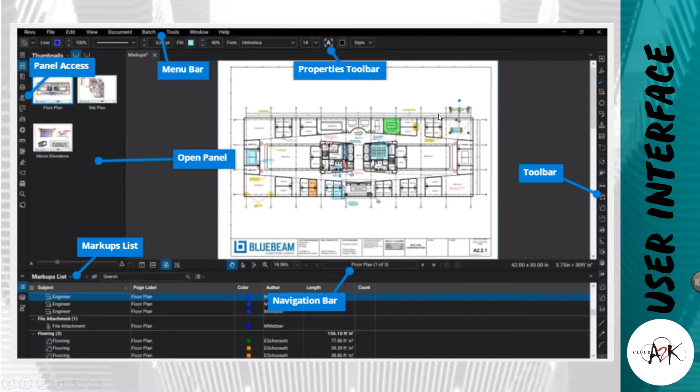The power of the PDF is that it contains all the metadata, so it doesn't just contain drawings or images. You can put hyperlinks in there, bookmarks, file attachments, images, and all the 3D data. It's really harnessing that metadata.

Now we'll get into the Revu demonstration in Revu 20. So this one here is Revu 19. We can see here we've got Studio Bluebeam, which is our American server. We also have the UK server. If I flip over now to our Revu 20 version, and go to our studio here, we have an Australian server - that little Australian flag there - and we can now go and host our data locally.

Revu 20 makes it easier than ever for your team to get more done together. It has greater flexibility control, enhanced markup and measurement tools to help you better manage your data. So I'm going to open now - I'll go through my Oz Studio, sign in.

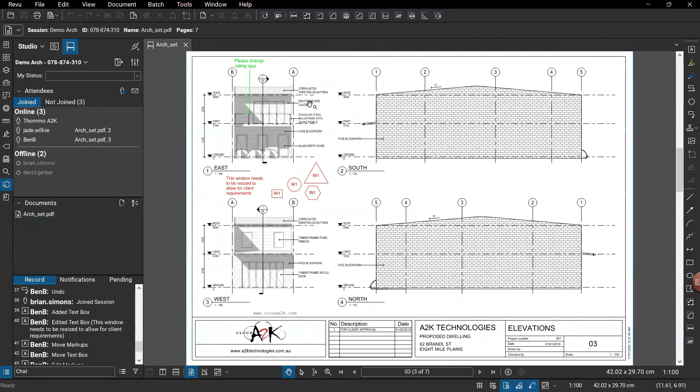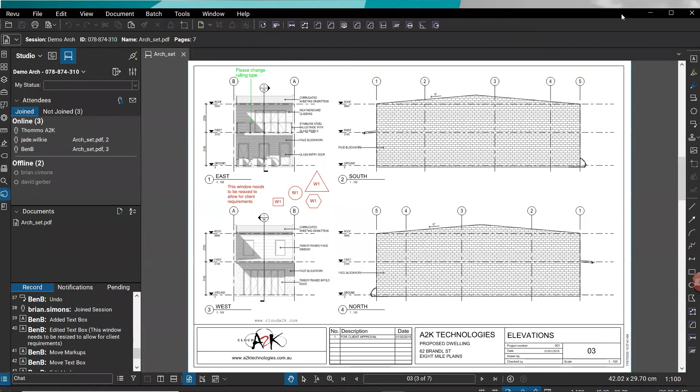One of the first things I really want to go through is the custom line types. Custom line types are available through our custom toolbars - I'll go back to my 2020 version here - and through my measure at the top, I can get in a simple perimeter or an area. So if I do a perimeter, I'll drag that perimeter around and close that off. Now, when I do this, we have a lot of extra features in here.

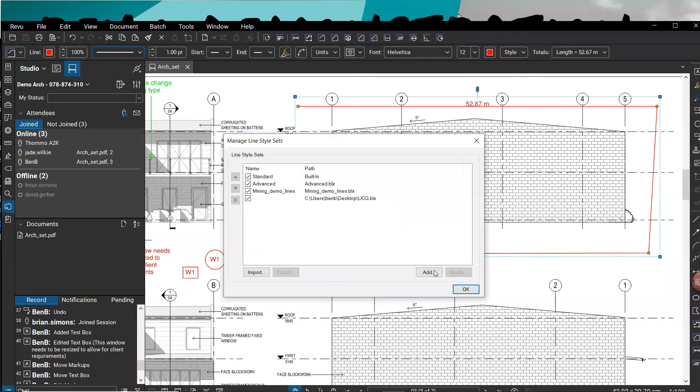With this line itself, I can come here and change it to multiple types - I can change it to a gas line, hot water, and I can also use custom line types if I wanted to through here. In 2019, we couldn't do that. I'll just sign in here as well - this is signing into the American server.

Be aware that the new Australian server is only on Revu 20, so you do need to upgrade to that.

I'm joining another session here which has the same work area on it. If I open this up, you can see that it's 19. If I go to do a line style in here, I only have the 6 types of line styles. So if I go to my properties now to change that, I'll see I've only got the standard 6.

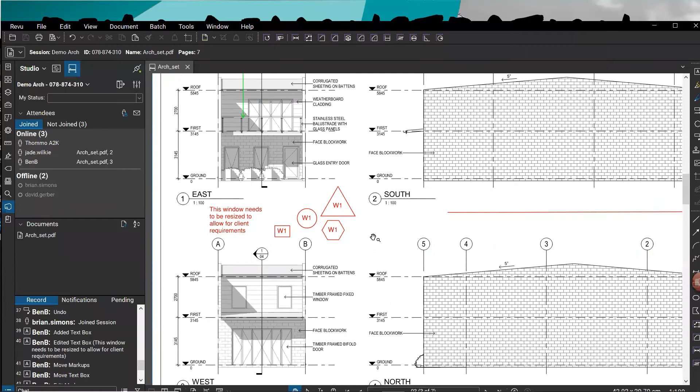So now we have a lot more user-friendly ones in there to use. That is one of the great improvements. Another improvement as well is we can change the style of our box here for a call out.

So for a simple text box, I can put in whatever text I want. I'll just call this roof for the example. When we go to apply a shape, I'll give that some thickness. In the new version, we have a hexagon, which may be a bit more useful for the engineering field. So we've got that hexagon in there as the new shape, where previously we only had the square, circle, and triangle. Now we have the hexagon shape.

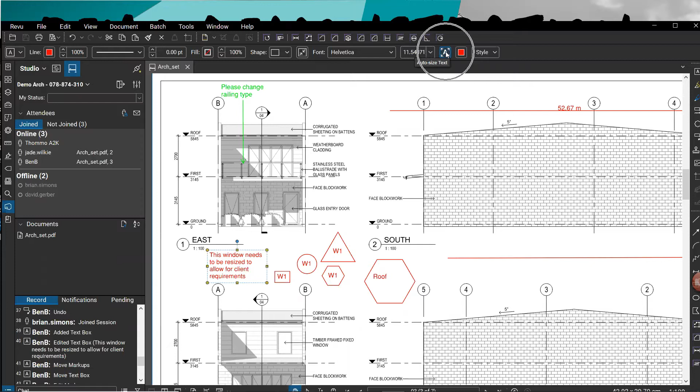We've also gone through and improved the multi-line text auto sizing. So we'll see here in 20, when we stretch out that to auto size the text. By selecting this here, or selecting it through our properties, by the auto size, that's where you change it to auto size here, and it really improves it for multi-line text.

As I stretch that, I'll see that it actually stretches that text out, changes it across to 2 lines, can change it to 1 line as well. So that is a great improvement.

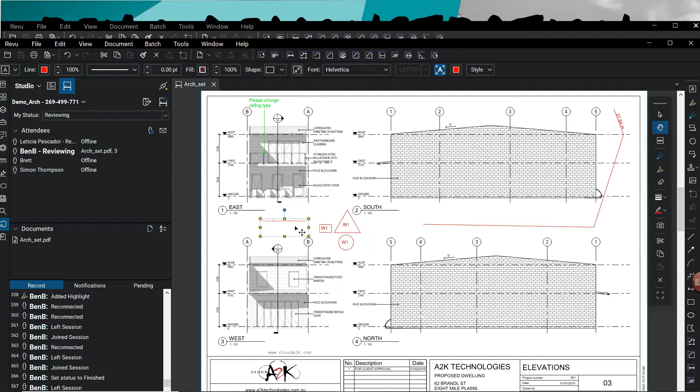Formerly in the 2019 version, where we had the text, if you did auto size the text and stretch that out, it won't go to the next line. So we can see that that just stretches the text out in 1 line. It's really improved that workability through here, when that will actually resize the text. That's a great improvement for markups.

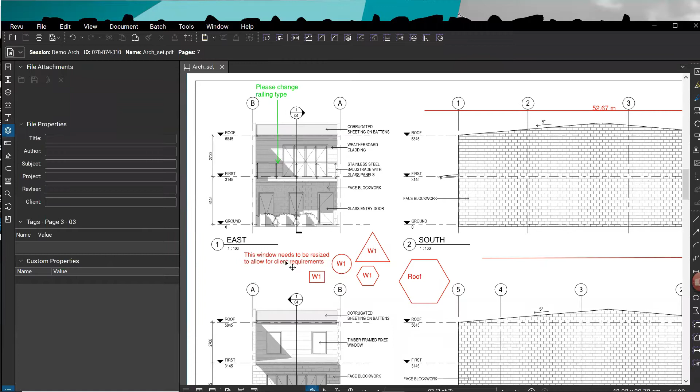Another thing we can do is put in arrows easily, so we can easily change this from just a standard text box to a call out. If I select on this here, we can see it's a standard text box. So if I right click, I can then add a leader, and this will change it to a call out. We can see as well that it picks up a different area for it, changing to a call out, and it actually takes it to the nearest point.

I can keep adding these leaders, so you can have multiple leaders and they won't all come from the one point. Again, if I add a leader here, I can take this to the bottom and it comes off the nearest point. That's a great improvement to what it used to be, where all your leaders would actually come off the one point. This will all grab the nearest point.

So that's a great feature through there.

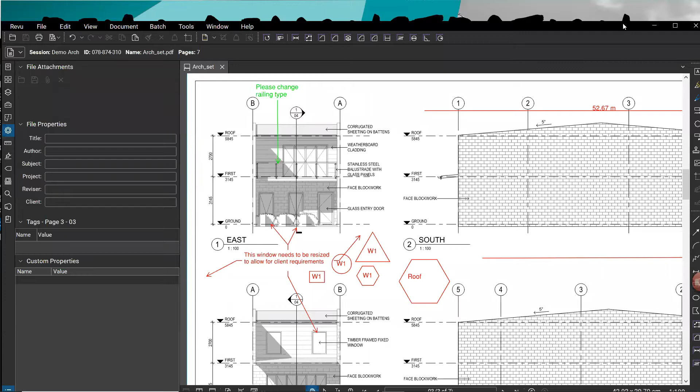We also have an improvement to our markup filter interface. Now we'll see that the filter has changed. If I select that, we'll see that it goes orange through here and it has a new interface. The beauty of this is we can easily add in the different items. Through here, the author, I can pick that and have my comments through here. I can also add the other comments from the other Ben B, which is still me. And I can add in markups as well for a particular page.

So I can come here and add in 01. What I can do as well is actually save these markups, like save this filter. If I click on here, I can now save this filter, so I'll save this as Ben's. Now that I have that saved, I can easily go through, and when I start a new project, they will be there. It makes it really useful to go to these markups in the filters list and select those filters straight off.

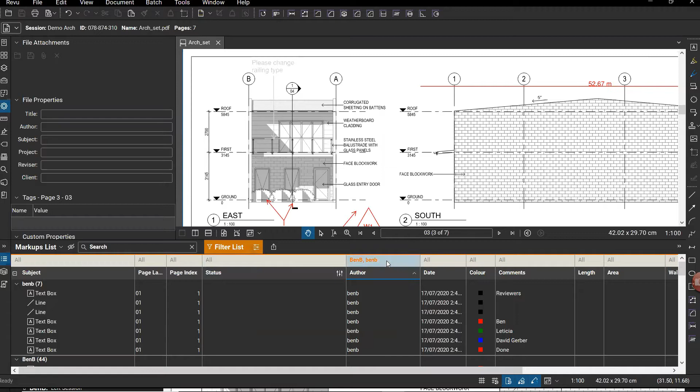I can delete them as well and make sure I keep that nice and trim. So that's a great way to be able to apply those filters easily to all the markups you have in there. It's a lot different in the interface than it had before.

Another improvement is in the area, distance, and numbering. Through here in the filter list, what I can do now is filter these areas by greater than or equal, and less than. We couldn't do that before. I'll go back to 19.

I'll go back to 19 through here and open my markup list. Once I go to apply those filters, I will see that I only have equal or does not equal.

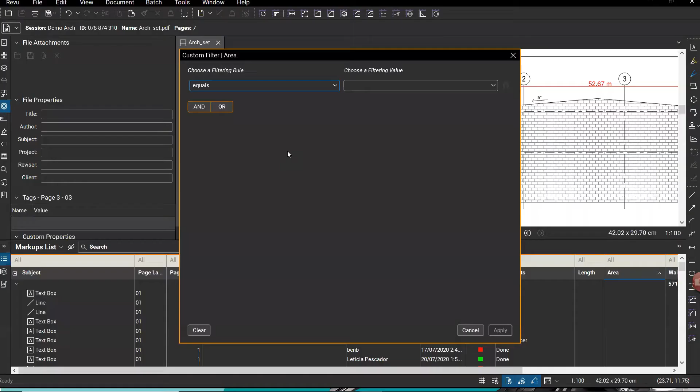So now in 20, we have that new feature where we can use greater than or equal. That will help a lot with your area and lengths, where you can rule out anything larger than a certain length, etc. So that is a great feature.

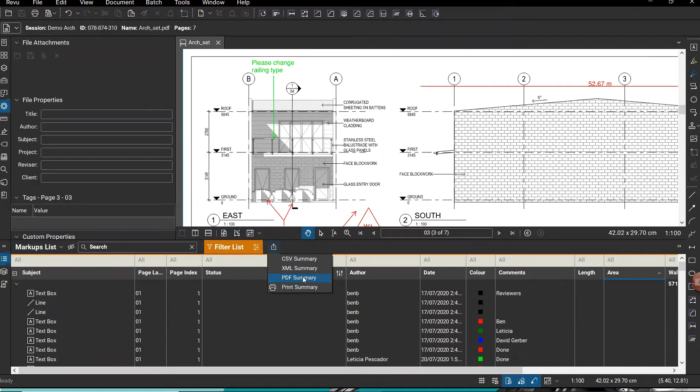Also exporting your markups. So when you go to export your markups, if I go here and do a PDF summary, this is a feature that a lot of people have been asking for. So under your output, under our options, we have in here where we can take out the replies. This will allow it to be a lot cleaner, particularly for those using the comments in Excel, that will make it a lot cleaner and you'll be able to pick out those lines a lot easier. This feature was unavailable in 19 and it's a great improvement.

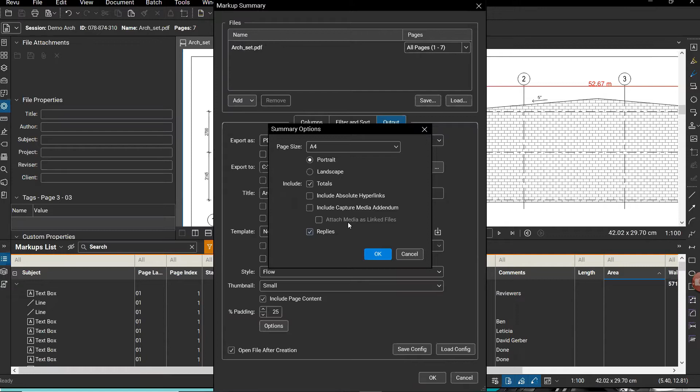So I'm now going to start to explore sessions themselves. One of the great features in sessions is that we now have a list of who has joined and not joined the project. So we come in here and we can see in the new Revu 20 data interface, we've got joined and not joined. This is a great feature because it actually saves time and reduces that risk.

A lot of people in the past, the emails actually come from Bluebeam and they've filtered them off into either a junk mail or a Bluebeam folder, and they haven't actually got the invite into the session. So you won't miss another session or project due to a missed invite email.

You can also check who hasn't joined your session. If you go through here, you've got a quick way to be able to select those and then send the reminder. So that is a much quicker way, and it's easier to get that management of the project. So you can set those permissions easier.

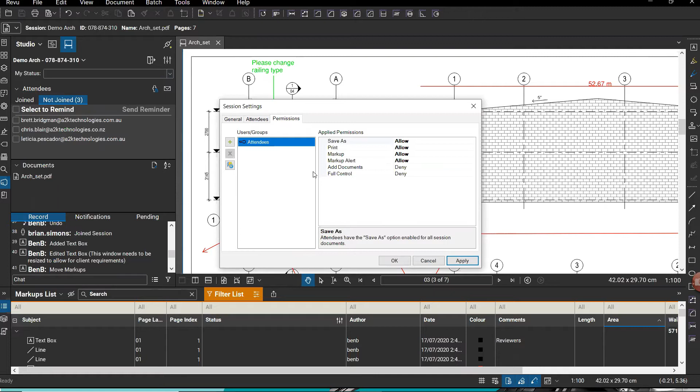It's all through here. It's all a lot easier, which manages to save time, maintain your security, and ensure that participation. So you have that list of people who haven't joined, and you can easily invite and manage that project.

This leads to higher adoption as well, and it will increase the return on your investment with the higher studio adoption. So we're all about collaboration with Revu 20.

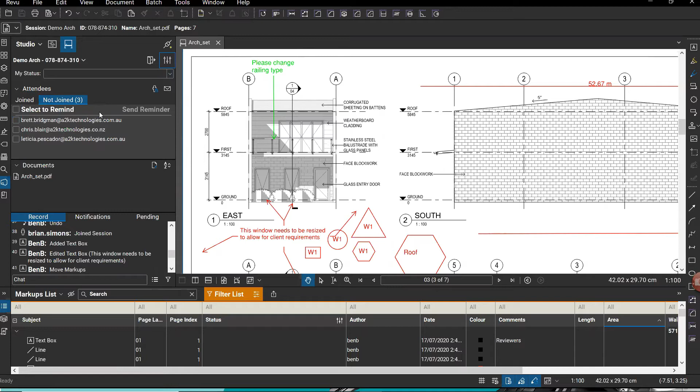We really want people to start to use and really start to get the benefits of both studio sessions and studio projects. If you don't quite know how to access them, always feel free to reach out to your Cloud A2K representative.

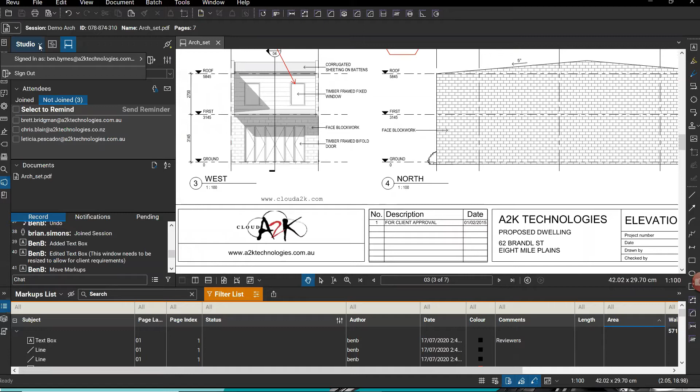When you actually start a session, what I'll do is I'll just start a new session. So I'll just leave that one, and I can go here to start a new session. So we've really improved the invite process. If I just go to demo test, I won't restrict the attendees by email address. And okay, I will add a small file in.

So that's added the file, and you'll see that this interface is a lot newer. So now we've got the opportunity to type or paste emails, add emails from group, or use address book.

And one of the good things with this type and paste emails, I can select that one there, and I can simply go to like an old email, or even if I've got something from an email that was sent, I can grab all these names. I don't need to worry about all the cases and text in there or whatever. It will actually recognize and remove those extra characters.

So once I paste that in, I've got all those names in there, and now I can check and include those emails. If I hit check and include emails, I'll see straight away it has gone through and it's picked out those email addresses. It's also picked out these domains. This will easily ensure the right people have access to the right information.

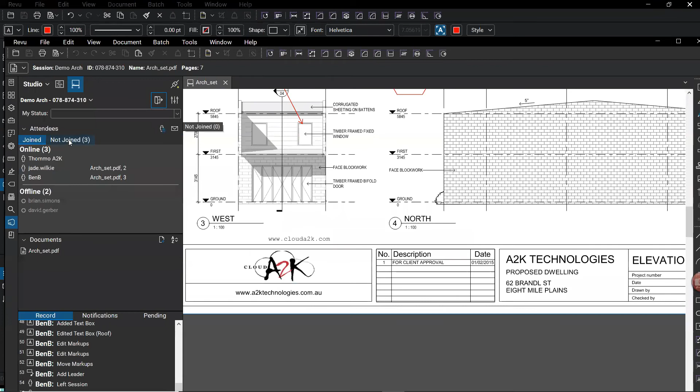The other big new item we have is that we can search for commands. So I'll just go back to my other session. I'll leave this session and go to my architecture session here. So it comes up quite quickly, as we can see. So we can easily search for a command.

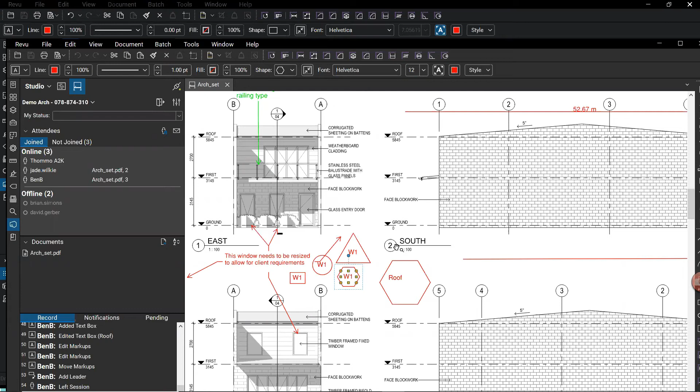There's a lot of different commands, obviously, and some people do get a bit overwhelmed, even though this interface is quite simple. You've got all your icons for all the items you'll be using through here, all your tools, markup tools, your measure, etc. So there's a lot through there. I know that I can change the color of this item. Once I select it, I know that I can do the color processing, or change colors, etc. So what I'll do is grab just a screenshot. If I use my G command or my snapshot command here, I can take a snapshot and then paste that back in.

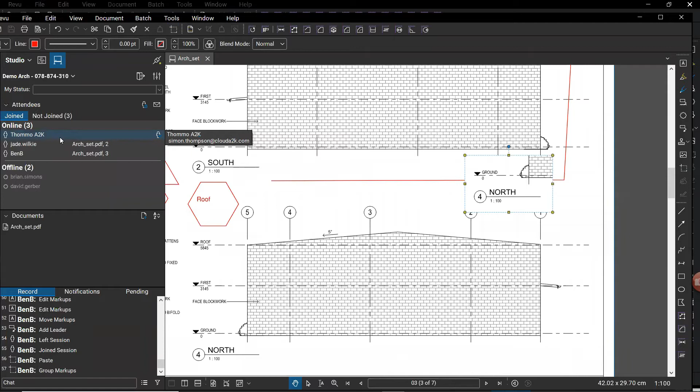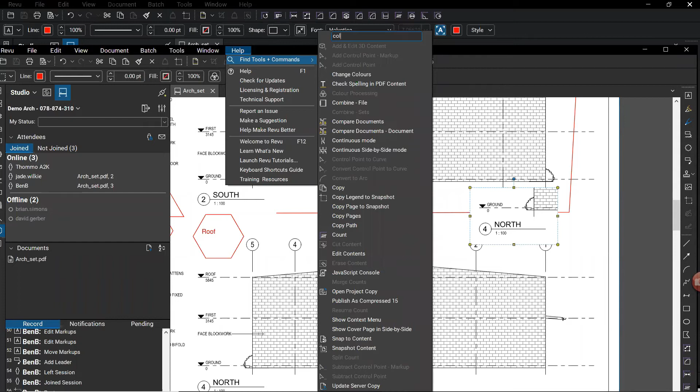Now I can change the color of all those items in there. I'm not sure if you weren't sure whether to do it through properties or whatever, but I know that there is a command to change the color. So I can go under my help tab here, select that, and go in through my find tools and commands. Now this is a great feature. It's used in a lot of other CAD softwares, etc. And it's a great way, particularly for people who aren't familiar with Revu, to come in here and just know that, well, I can change the color. So as soon as I start typing in that color command, I'll get that change colors option. Then I can change the colors of these items, go through and change all my black to red, etc.

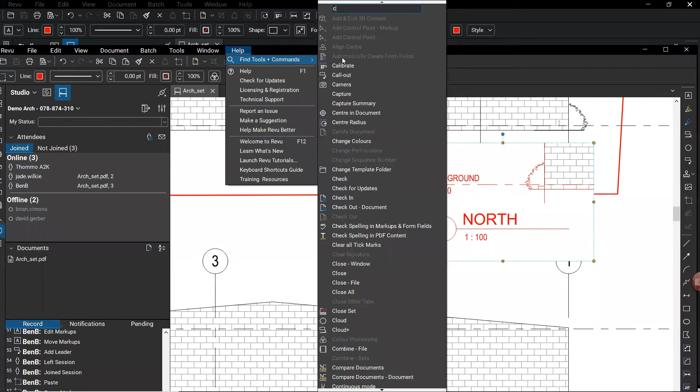So it's a great way to be able to find all those commands, even simple things like your calibrate, etc. Once you click in there, it'll come straight up. You can see it grabs those letters and just looks for everything starting with C, and then breaks it down further and further. So it's a great way to use those commands and find all those commands through there.

But the big news is the Australian server. That is the big feature for Revu. So that will allow you to work in real time with your project team locally with your new Australian server. Now, Studio meets Australian data residency requirements, so your organisation can really reap the time and cost savings of real-time collaboration. It meets the regulatory requirements, it will have a higher return on investment, and it will minimise the risk having that Australian server.

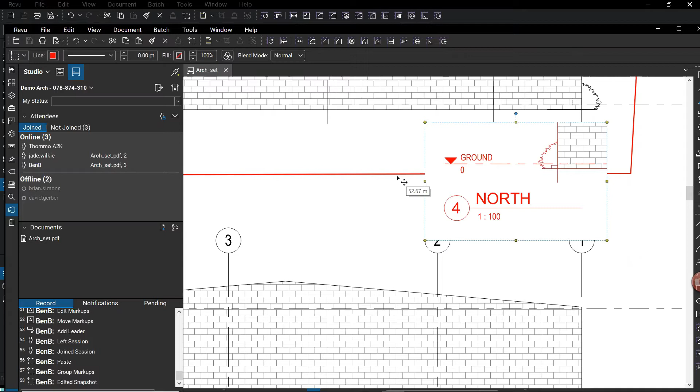So that is only a feature that is available in Revu 20. Make sure that you reach out to your A2K representatives to get that feature.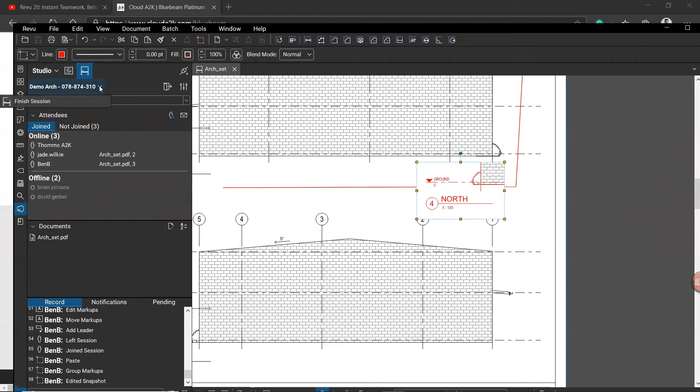Someone is asking what's the difference between a project and a session? So a project is your cloud storage. This, here, is your cloud storage, and that allows you to access and basically use it as a cloud file management system. Because it's only new, I've only got a limited amount of both projects and sessions in here for the new 20. If I go back to my 19, I do have a lot more projects available, obviously. And this is where you can have all your assets, everything in here for this.

So for this construction project, this will be faster too on an Australian server. These are currently on the American server. Here I can contain all my drawings for that project. I can also have all my images and have a heap of images hosted on the site as well. This is a great way to use that cloud storage to have all your content on there, and anywhere you have an internet connection, you can access these pictures and the full file.

To do a quick comparison between both sessions and projects: projects are unlimited in how many people can access them, so they're great for document handover. Sessions can have up to 500 people. Sessions are this one that looks like the whiteboard, and they're more for project collaboration where everyone can access the single PDF.

You can have up to 500 documents and files on a session, whereas in projects it's unlimited. So you've got unlimited storage, any file format, any file size. The markups are unlimited and the space is unlimited, so it's a great way to have cloud storage that's absolutely unlimited.

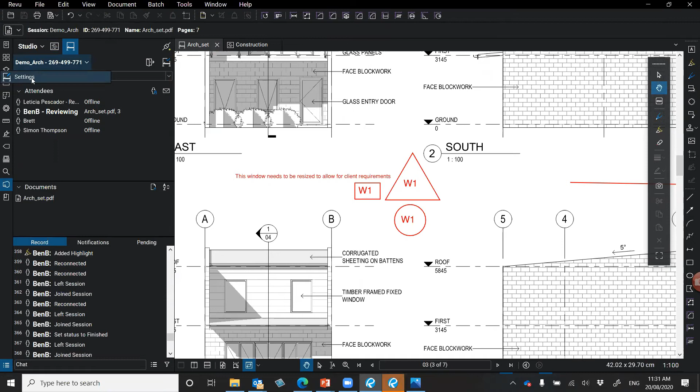So if I go to the session here, I can come to the settings, and through here I can put an expiry date on it. As a host, I can come back and change that date. So I can give everyone until Friday afternoon to make their comments, and let them know in that email that I'm going to be closing the session on Friday. That way I can make sure everyone's got their comments in, and I can action what comments they've made.

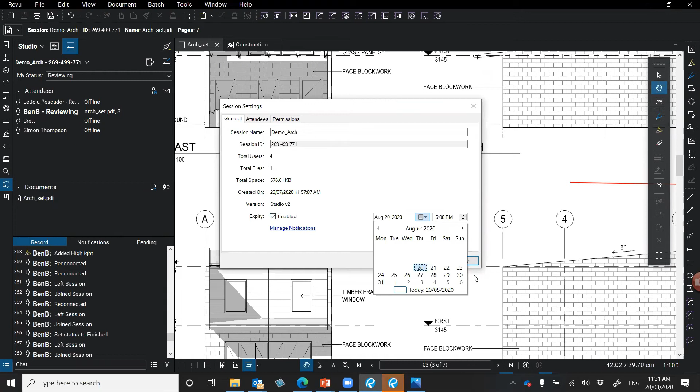So in through here, I've got all the comments. You can reply to comments. These are all live comments that have come through.

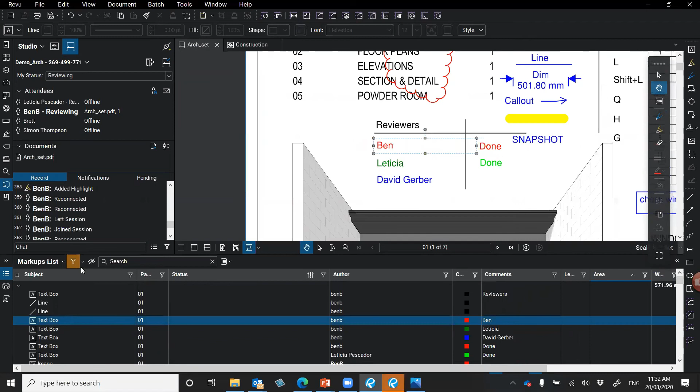So I can have that on. Just a reminder with sessions, once you've made a markup, you don't need to save your comments. Markups are recorded live and updated on the cloud server for all to see. You've got this record on the left here where it tracks everything that's happened in that session, so you can go back from the first point when the session started and follow it through, and you've almost got all your QA processes right through here.

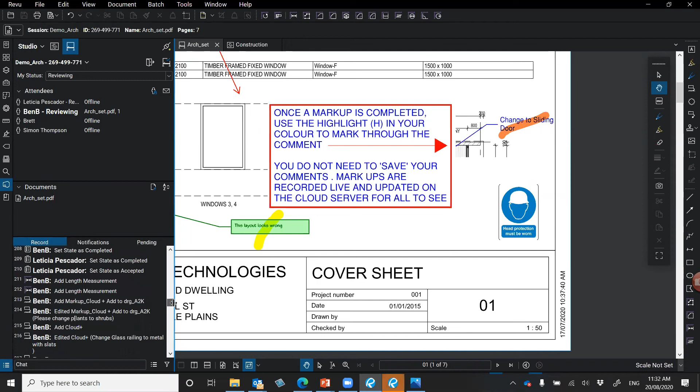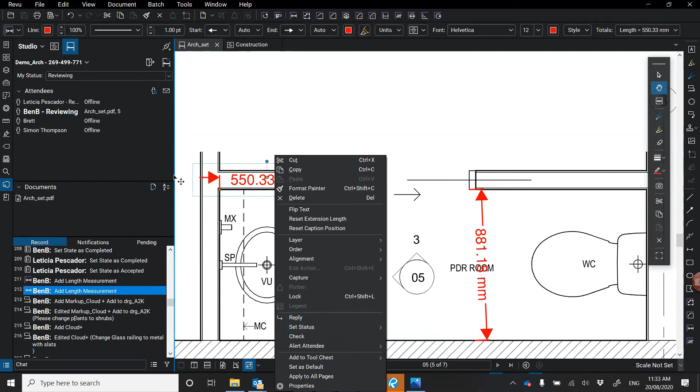So I can jump straight to that markup through here, select it, and I know what's happened, so I can go to that length and grab that length measurement. Through these markups as well, I can also reply, set the status of that distance, or set a comment in through there. So if I go to the markup, select that distance, and then I can reply to that.

And that will track all those comments and distances, so you can have all the comments to it, and then you can also change the status of those length measurements.

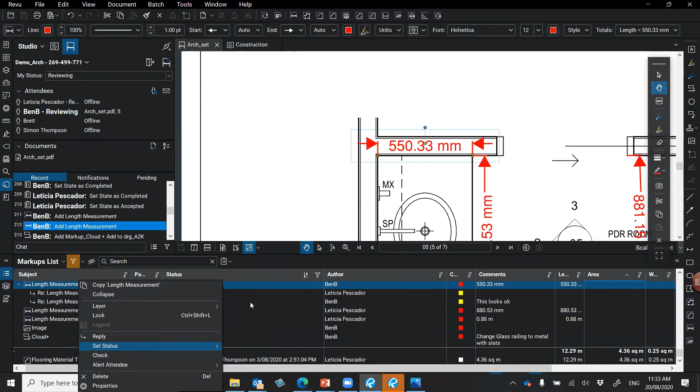When you go to export, you can export through here, go through the output tab. In version 19, you didn't have the option to take out the replies. So a lot of people took this data and pushed it through Excel, using the power of Excel to go through the comments. But when people had the replies included, it would muck around with the Excel a bit, so you'd have to go in and delete the replies and do extra work.

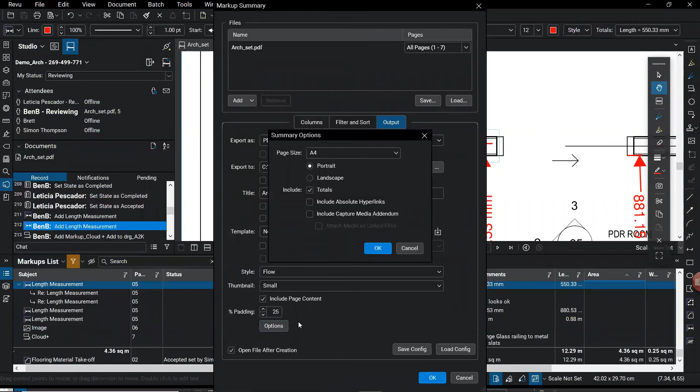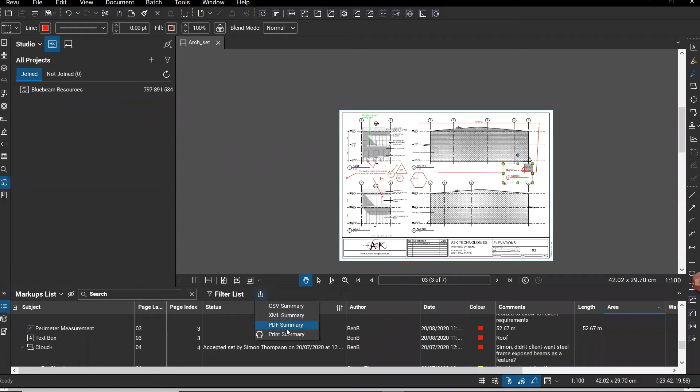We're now in the new version 20. In the markups, when you go to output those, I've got the window too low, so when I change that back up, I'll get my markups for this one. Now when I export this PDF summary, under the output and under the options, I can take out those replies. So I can filter those replies out before I even get to Excel.

The Australian server is one of the big things. Studio admins can now invite and assign permissions to users before they even have a studio account. One of the big things people need to know is that you don't need a Revu license to participate fully in a session. We do that so contractors and builders can send it out to their subcontractors, who can join the session and participate fully with all the full markup features in an unlicensed version of Revu. So you can send this to someone who doesn't have a Revu license, and they will get an email telling them how to join and download a trial copy of Revu. It's quite easy to get through that.

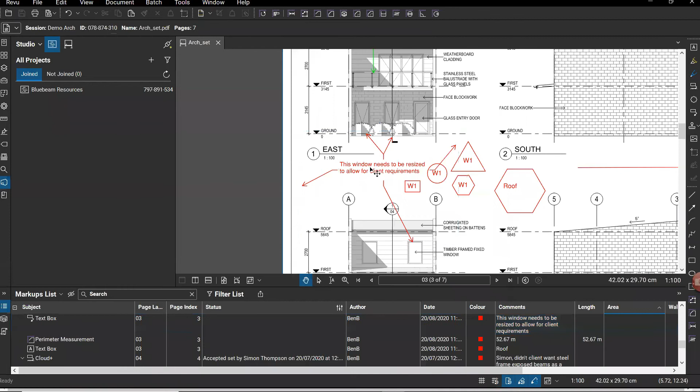With the leader lines, you can remove all the leader lines through here. So if I go through and just remove all those leaders with that one.

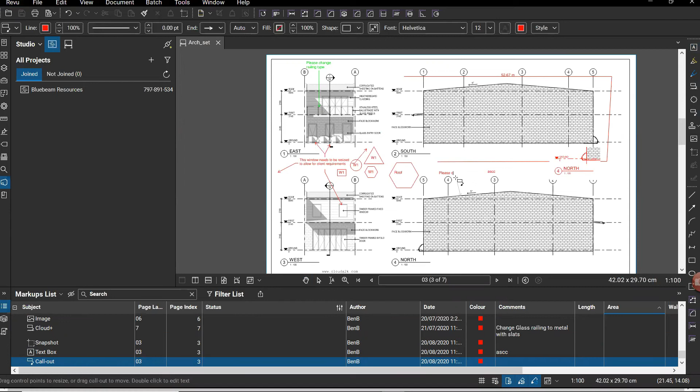If I have that as a call out, I'll do a call out, which is the one with the leader here. So that is now a call out. If I go to the properties, I'll see that it's a call out. And if I remove that leader, that will change it back to a text box.

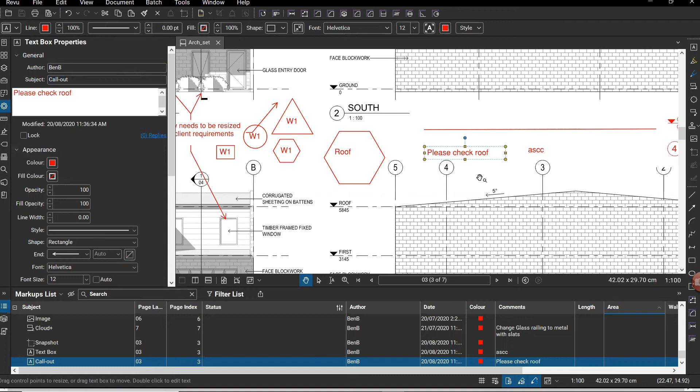They can have as many leader lines as you want coming out of any or all sides, saving you a lot of time when you need to communicate a similar change or markup to many areas. Just by adding those leaders, where before it would be a bit more difficult with a leader coming off that point, I can now add a leader and easily drag it to the other side. These are editable as well, so I could stretch that right out to be a proper right angle leader if I chose.

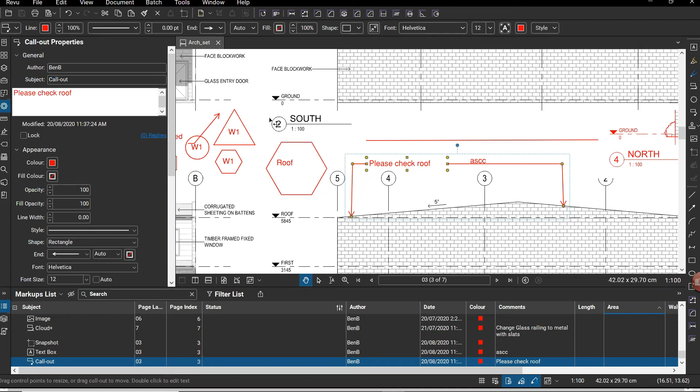This markup will really help the efficiency of how you do those markups. The hexagon shape has been added as well, which helps you communicate more effectively.

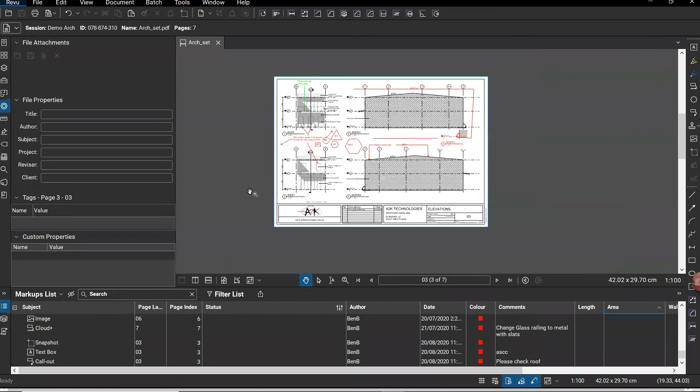So they're probably the main 7 things that have come out of the new Revu 20. It's really about the collaboration. We've got custom line styles going from 6 initially to multiple line types, which you can also customize. We've got the hexagon shape now for our text box. The multi-line functionality has really improved, where it will actually resize to separate lines. The new filter interface is good, and you can export your filter list and save these filter lists.

You can save filter lists and use them again in future projects. Once you have a certain filter set up, you can save it, and then use that same filter in different projects.

There's a greater than or less than feature, where you can use areas, lengths, or any other custom columns to filter by greater or less than. You can export the markups, and now you can decide not to include the replies, which makes it a lot cleaner to use in Excel.

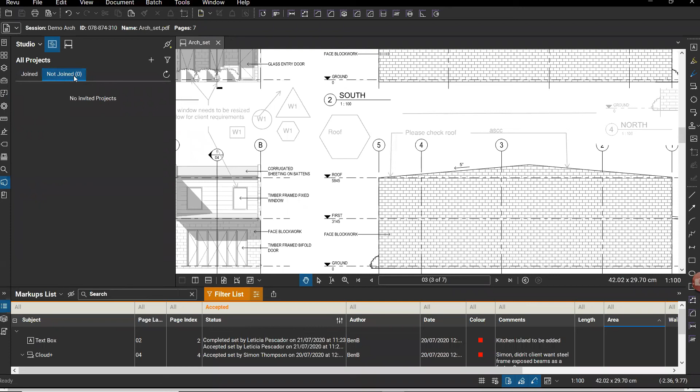The sessions themselves are a lot easier to use. It shows joined sessions, and it even shows sessions you haven't joined, telling you about projects you've received invites to but haven't joined. It's a lot cleaner and easier interface to use. The email address system is also a lot cleaner, making it easier to add new people into those projects.

So I'll review some of the questions. I've explained the difference between a project and a session. Can you limit who has access to which projects? Yes, you can. All you need to do is go through the settings. I can click on that, go through the actual settings of the project.

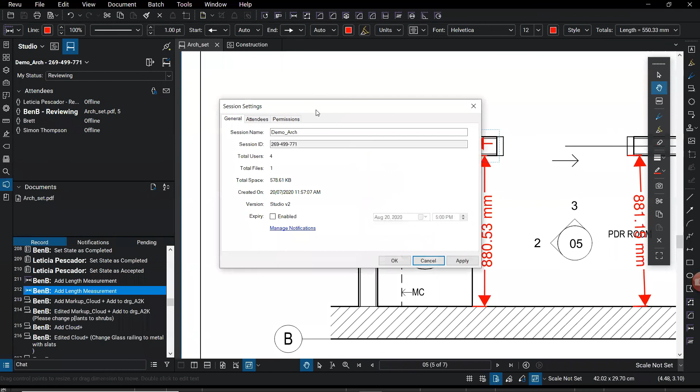I didn't actually set up that project, so you need to be the host. On a project, through the settings, I can go to the permissions and attendees, and restrict those attendees by email address, so only the people I email get access. You can let people in it add attendees as well, which you can turn off. You can also deny access to particular people.

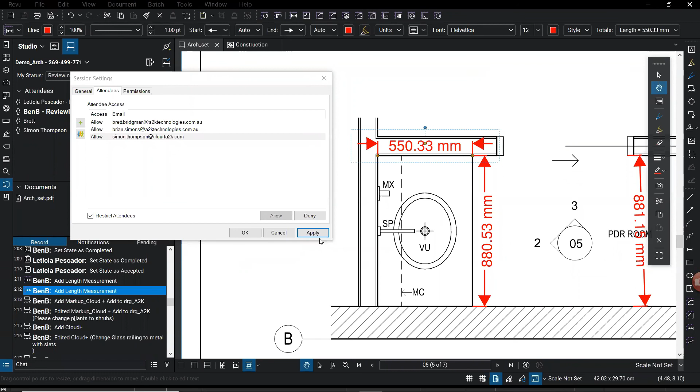Can other people who didn't start the session get email notifications about user activity? I don't think so. I think you can only really get that as the host. You can alert people through the functions here, so I can find anything I've added, or even someone else has added.

So when I make a new measurement, for instance, or even a line or a simple callout, Cloud Plus...

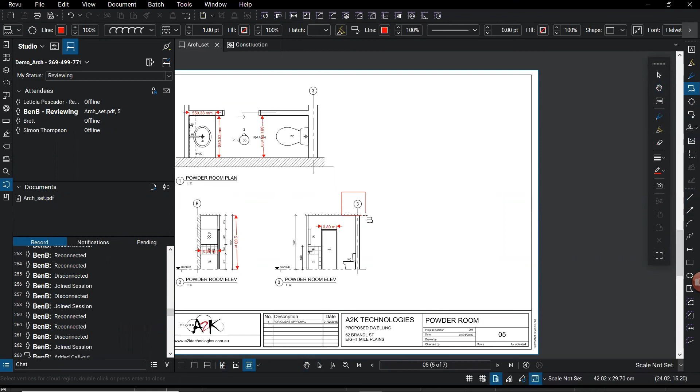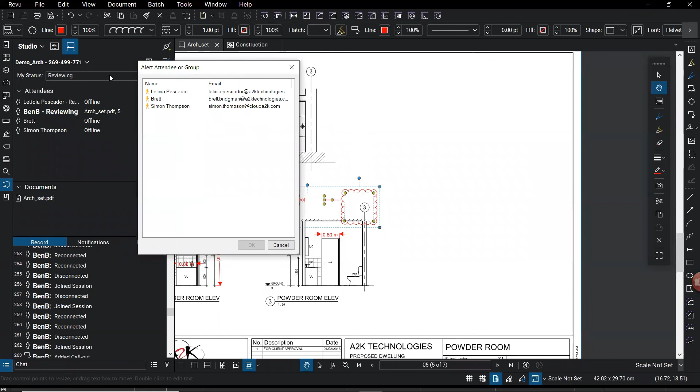So I can alert people to those comments. If I click that, I can go to alert attendee, and choose an attendee I want to alert of that change. Through here, I could send that to Leticia, and she would actually get an email alerting her to that item.

Template for a markup summary - I'll have to probably take that on notice. That's probably a bit of a workflow.

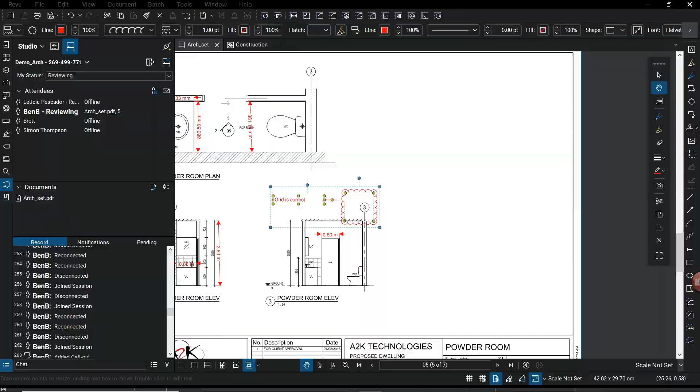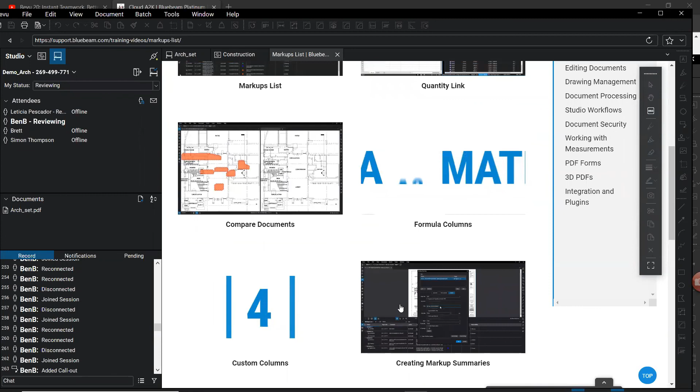Feel free to email or hit up your Cloud A2K rep for any questions you've got. The help is quite good as well in Bluebeam, there's a lot of videos in there. If I go under the help tab and go to the tutorials or training resources, this takes you straight to the Bluebeam website. You can go to a markup tools section, or even a markups list, and through there get your quantity link, formula columns, etc. Creating your summaries and templates will be through there.